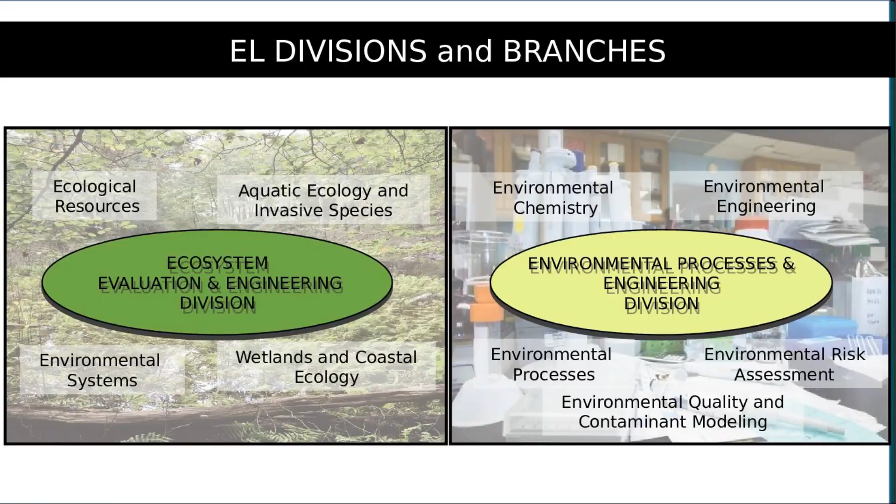And so with that, I'd like to transition to our first speaker, I believe will be Dr. Todd Bridges, to cover the first emerging capability area. Thank you for your time.

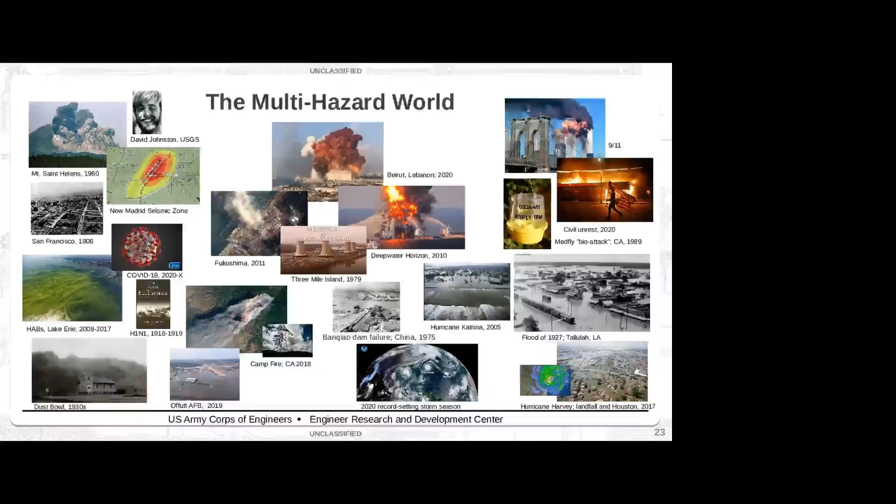In fact, in the 20th century, the amount of human-made mass in the form of these materials that was produced and put into use doubled every 20 years. That curve really challenges the whole notion of sustainability. Where's the end of this curve? Is there an end to this curve, especially as we approach a population of probably in excess of 10 billion people on the planet by the end of the century?

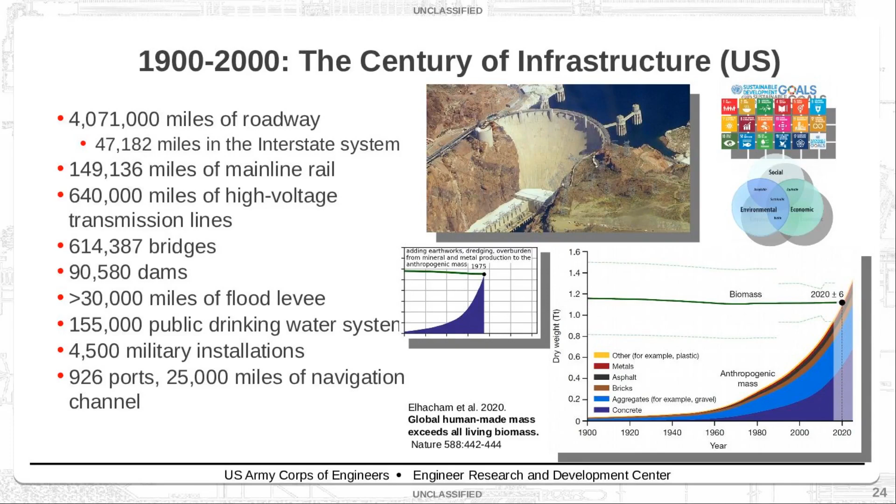So when we think about the infrastructure investment that's going to be made in the remainder of the 21st century, it's going to be a lot of money worldwide—the World Economic Forum estimates by mid-century that $100 trillion will be invested in infrastructure. What is that infrastructure going to look like, and how's it going to operate? That includes the idea of to what degree are we going to include natural systems more explicitly as a part of the infrastructure we develop.

And this is one example of what I mean by the natural system as infrastructure. Some scientists being supported by the insurance industry used insurance industry tools to estimate the benefits provided by mangrove forests in Florida during hurricanes, using one hurricane in particular to get specifics: Hurricane Irma. Their estimate, using insurance industry tools and models, was that mangroves were responsible for avoiding $1.5 billion in flood damages from that one storm.

This is one example of our Engineering with Nature initiative, which we began formally in 2010. We celebrated our 10th anniversary last year, seeking a more intentional alignment of the natural and the engineered to realize efficiency and sustainability in delivering infrastructure projects. We emphasize science and engineering to produce efficiencies, using natural processes to maximum benefit, expanding and diversifying the types of benefits we can produce from infrastructure, and being collaborative in producing these approaches and solutions.

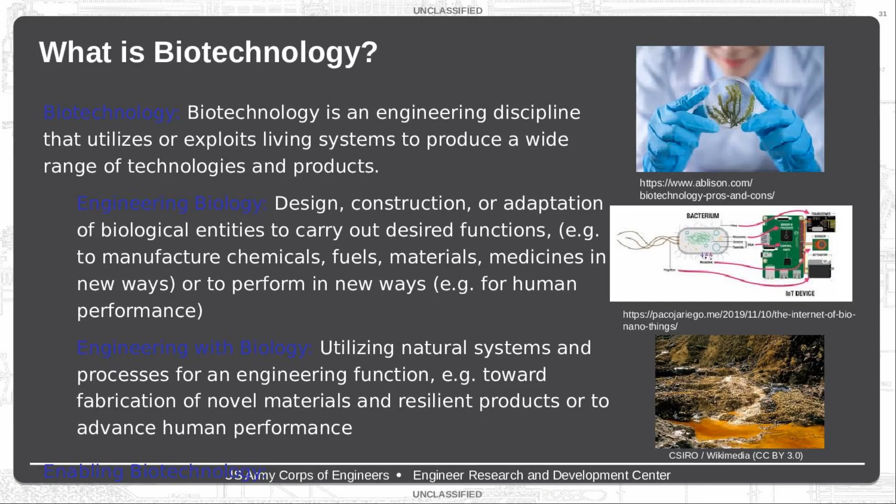Next slide. Just to give you an overview of how impactful biotechnology is now, one of the most important inventions for biotechnology has been fermentation, evidenced by evidence from thousands of years ago from the first beer that was produced. So production of wines and fermented drinks is really all about biotechnology and harnessing yeast to help us make more interesting beverages.

However, over the next 10, 20 years, we really expect the application area of biotechnology to expand from meats that are produced without animals to medical solutions for monogenic diseases, personalized diets, to synthetic silks produced by microbial factories. Some estimates are up to $2 trillion to $4 trillion for the whole world market.

Right now, they estimate 60% of the world's physical inputs could be made using biological means, that is, materials and other items, over the next 20 years, so having this impact of $4 trillion globally per year.

The most recent big impact that we've seen has been the rapid development of COVID-19 vaccines and tests. We've had an unprecedented rapid development of vaccines to different strains and varieties of COVID using mRNA technology, and a number of very specific tests developed rapidly for the presence of these viruses in humans and in saliva using biotechnology type tools.

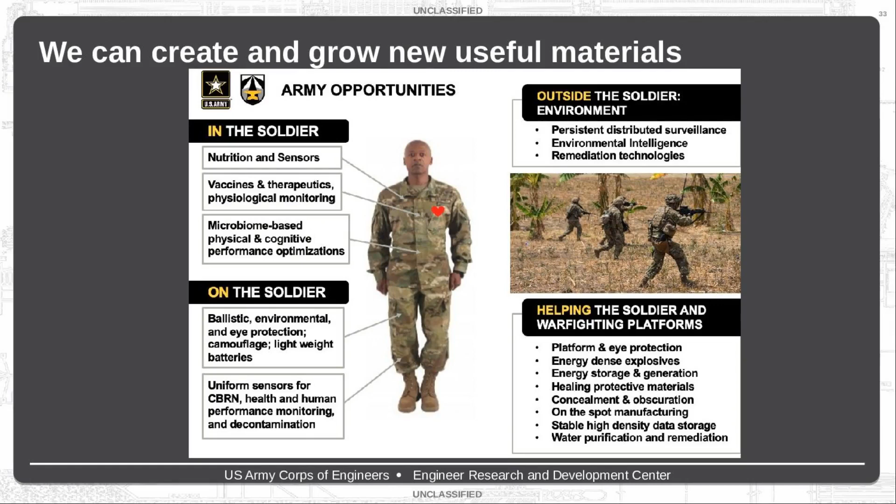So one of the big areas that are kind of non-biomedical is really growing structural materials. And that's where we're starting to get into ideas like engineering living materials, taking things like fungus that might grow very rapidly and using that to grow into structural elements.

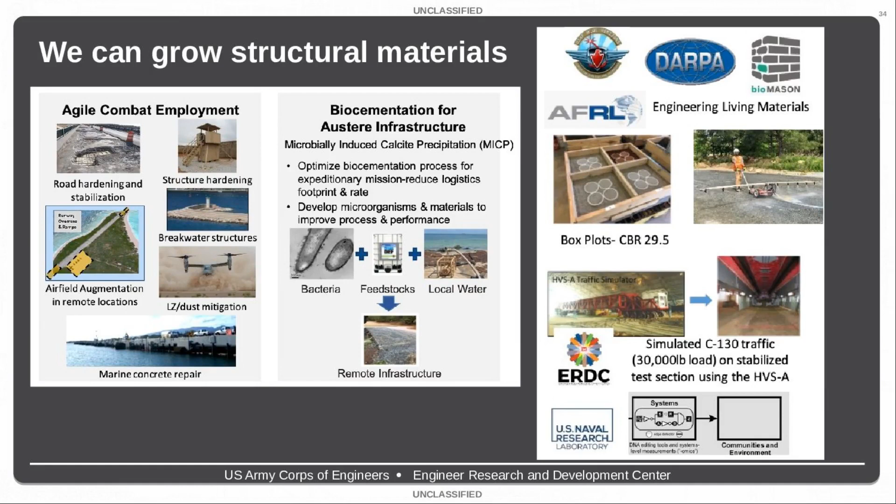And the importance of this is that it is very low carbon and takes a lot fewer materials than moving truckloads of cement materials around into different theaters.

So really, this is all about changing how we do engineering with nature. So while Todd was engineering with nature in a more natural way, here we're trying to actually engineer nature to help us do things in the environment.

Major areas that we're hoping to start developing products for are infrastructure, expeditionary infrastructure, ways that we can use biology to build structures out in the field for the Army. Self-destructing infrastructures, that is buildings or bridges that might fall apart when you don't need them, so they just sort of disappear. These processes are often low CO2 emission, so they don't contribute as much CO2 as all the billions of tons of cement that have been put over the last few years.

You can also design these processes for CO2 sequestration. There's methods for developing anti-corrosion, anti-fouling materials using bacteria. And also infrastructure failure can be addressed by developing bacteria that can fill cracks. And then self-repairing materials—there's potential for creating concrete embedded with bacteria that can start repairing it as it's being developed. Really, where we think this can apply is engineering nature for resilient infrastructures.

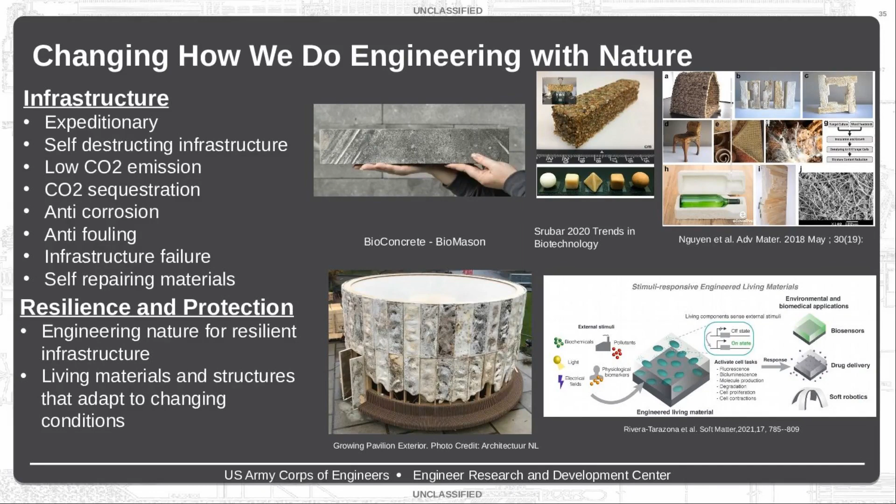There's been discoveries of using bacteria that you can put into cement that will start sealing up cracks as they occur. And in the upper right-hand corner is an illustration of using fungi to build buildings. This is using myco bricks from Ecovative to construct this building, and you can actually have that building start growing over time. We also now have technologies where we can start making resilient wetlands by making them resistant to insects and salt water.

Biotechnologies that can eliminate invasive plant species. Trying to make self-cleaning and stress-reporting streams by putting bacteria on them that will sense chemicals in the environment, destroy them, and tell you the health status of the streams. One area where this could have direct applications is trying to enhance phytoremediation of recalcitrant chemicals, such as at the Niagara Falls storage site, which is one engineering-with-nature project.

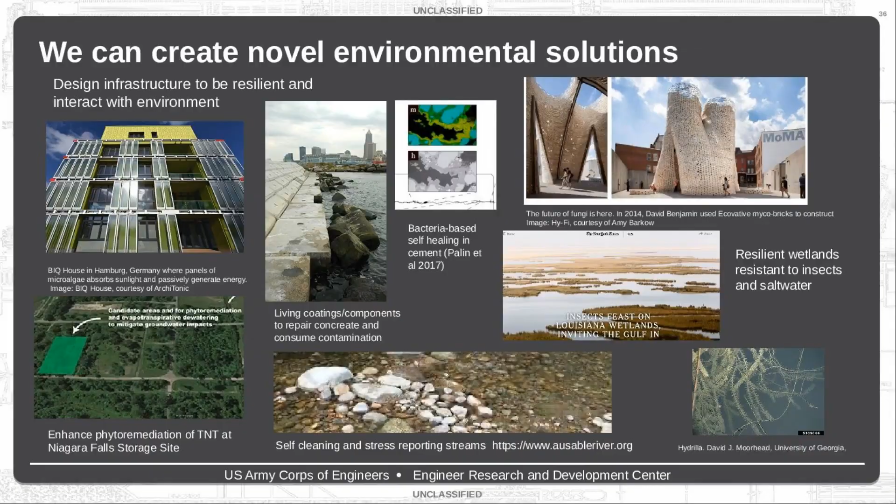Well, that was the end of my talk, and I just wanted to give you a taste of what biotechnology is and what it can do for you. Thank you.

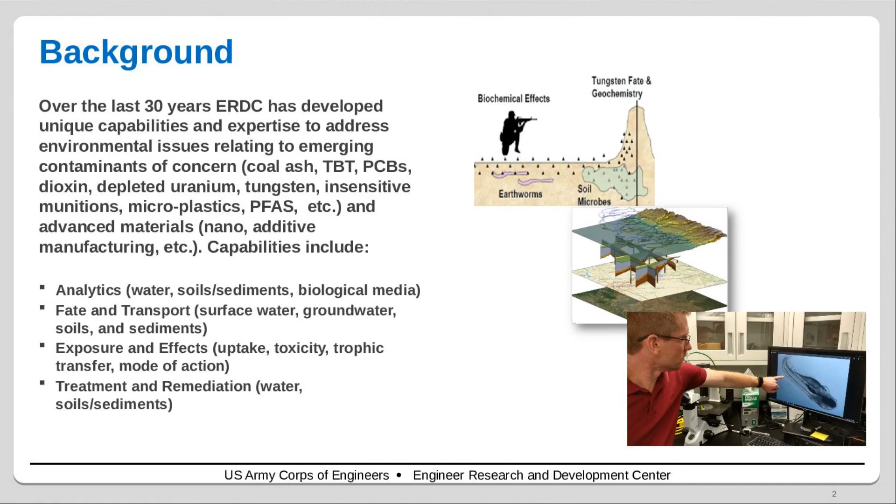The problem we encounter looking back at the historical approach to ECs, emerging contaminants, is it's a little bit like whack-a-mole. Often we don't realize there's a problem until it's actually having a programmatic impact. And as most folks on the phone are aware, it takes some time to spin up RDT&E to be able to address those issues. So we find ourselves in a reactive mode, responding to rather than actually engaging with or affecting the regulatory environment we find ourselves in.

The second issue is that it's been done piecemeal. The squeaky wheel gets the grease, so to speak. For example, on PFAS, the first and highest priority was addressing drinking water on our military installations, because of course we want to protect our soldiers. But we're not thinking broader and more holistically about the fact that there are also large implications on our civil works side for our dredging and navigation mission.

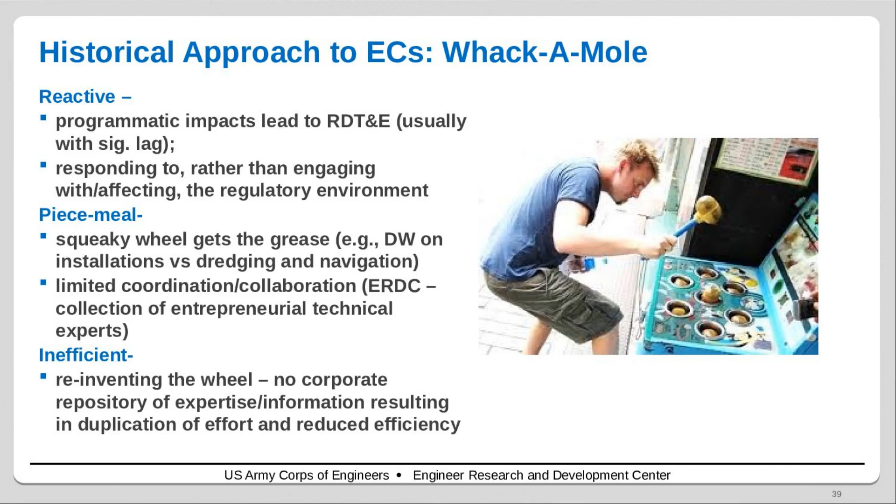So as I mentioned at the outset of the talk, around 2017, late 2017 early 2018, we developed this program for emerging contaminants. The thought process here was really to avail ourselves of the capability sets and facilities across the ERDC, thinking back to Dr. Russo's talk of introducing the 7 laboratories and the broad array of technical expertise that we have here at ERDC, and basically creating a coordinated multidisciplinary approach to provide turnkey support for addressing emerging contaminant issues. This includes things like rapid assessment capabilities, development of new analytical techniques.

Taking advantage of our high performance computational capabilities through our information technology laboratory to utilize things like advanced computational models that enable us to do a read across, where we might have a lot of information about one set of compounds, and utilizing that information and the chemical structure for compounds we know less about, we're able to infer potential risk associated with the chemical and physical properties of those compounds.

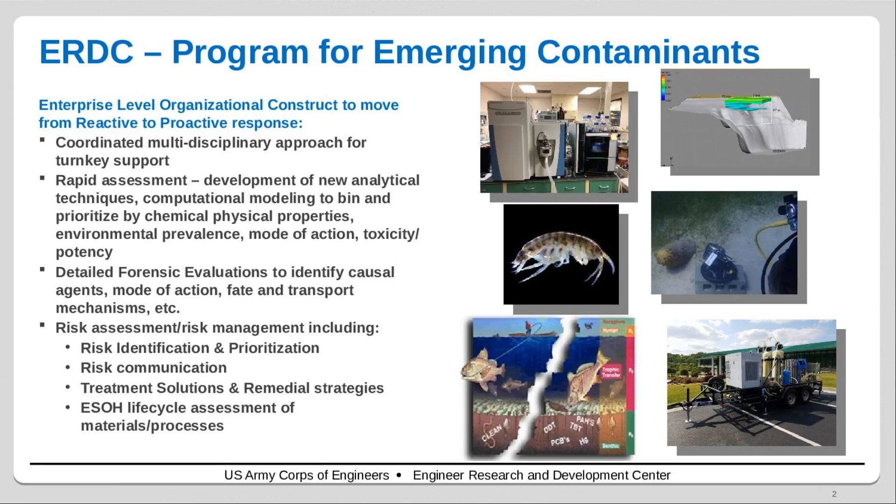So the one thing that the center is trying to do is avail itself of a whole of ERDC approach in these 4 key topical areas. On the analysis front, we have capabilities within the environmental lab and the cold regions environmental research lab, as well as the geotechnical and structures laboratory. And I should mention also ITL, where we develop new sensor platforms to detect and quantify contaminants across the full spectrum of environmental media: air, water, soil, sediments, biota, and materials.

On the exposure side, we have capabilities and expertise in EL and CRREL and GSL, our coastal hydraulics lab, as well as the high performance computing capabilities at ITL to enable us to better understand fate and transport mechanisms, uptake and movement through food webs.

On the effects side, we have capabilities and expertise within EL and CRREL, again supported by the big data capabilities of ITL. And then finally at the risk characterization and management end of the spectrum, again EL, our construction engineering research laboratory, and ITL provide support on things like computational modeling, life cycle assessment, and treatment and remediation.

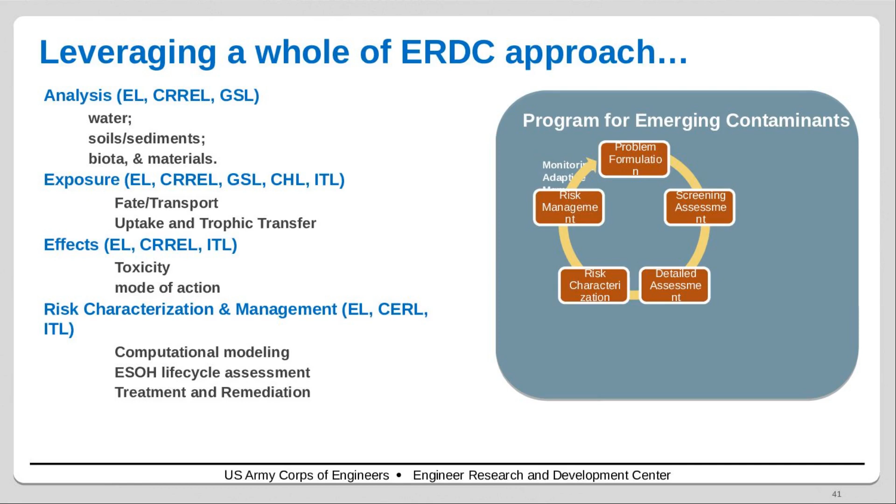So not only do we avail ourselves of the expertise within ERDC across our 7 laboratories, we also have mechanisms, vehicles to work with outside entities. We have everything from intergovernmental agreements and MOAs to work with other federal agencies as well as within the DoD. We have agreements with a number of academic institutions. We do a lot of work through cooperative research and development agreements with private industry, and we have international agreements where we partner with other nations to work on specific issues.

So just by way of example, one of the big contaminants of the day for DoD and others is per- and polyfluoroalkyl substances, and we've certainly been doing quite a bit of work on that front. The thing that I want to convey is that these are not siloed efforts. A lot of what we learn in the analyses and the exposure front feeds into supporting our understanding of risk and also in developing solutions. So there's a lot of crosswalk that happens, and that's the advantage of having an organized program to facilitate that exchange of information and foster those kinds of collaborative exchanges.

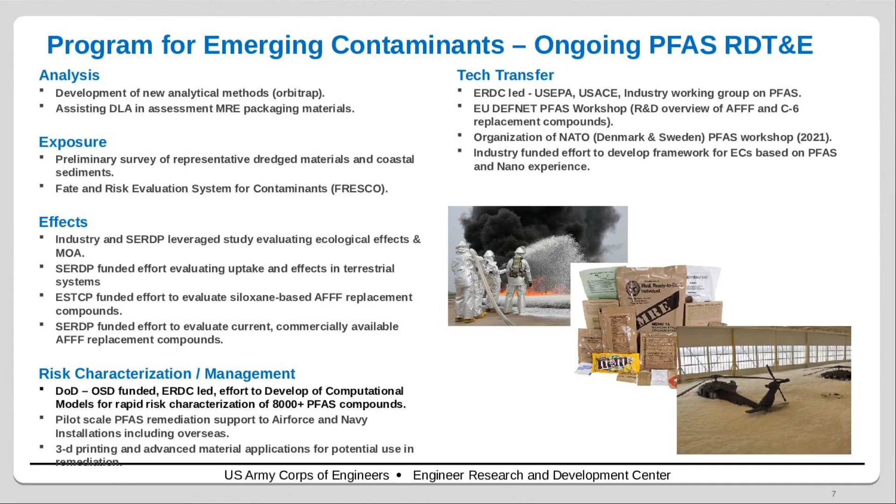And with that, I think I'm on my last slide. Yep.

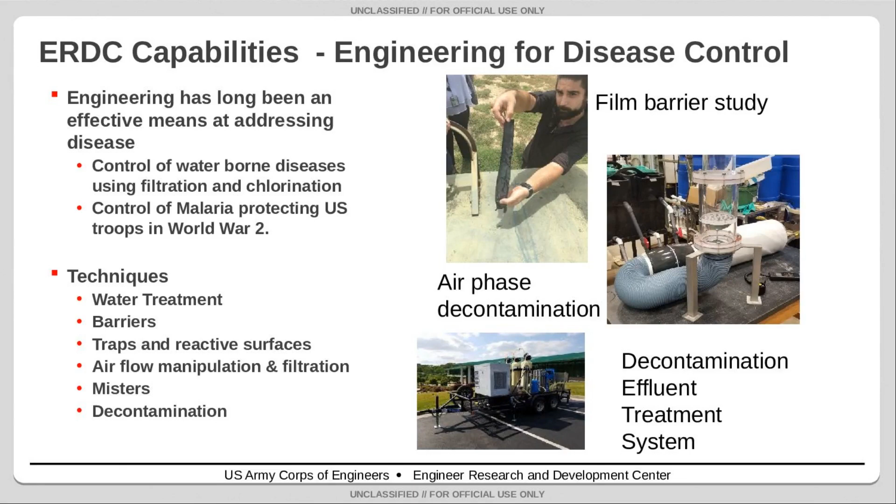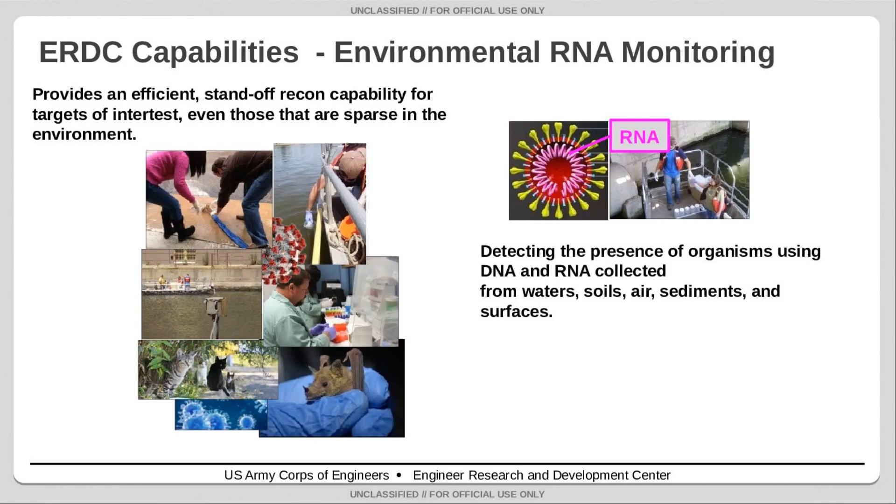We, of course, use biotechnology that Ed mentioned to address more unique sampling strategies like RNA monitoring to address pathogens, and we can do it for COVID, of course. I will be skipping it because it's late in the game.

On risk assessment, the previous presentation talked about that. What I'd like to highlight is that for pathogens, you need to modify the traditional risk assessment framework, and we are working on that in the context of both synthetic biology and microbial risk assessment and pathogens. There are unique features of these pathogens that need to be addressed, and we are working on that, but more needs to be done. There are big gaps, and again, that may be collaboration potential.

One of these modeling efforts that we're working on now with HHS and FDA, we try to look at vaccine and medical supply chains, because we clearly see that design for efficiency that was implemented fails when you have pandemics or global crises like this one. And the question is how we, as a government, can ensure resilience in supply chain networks.

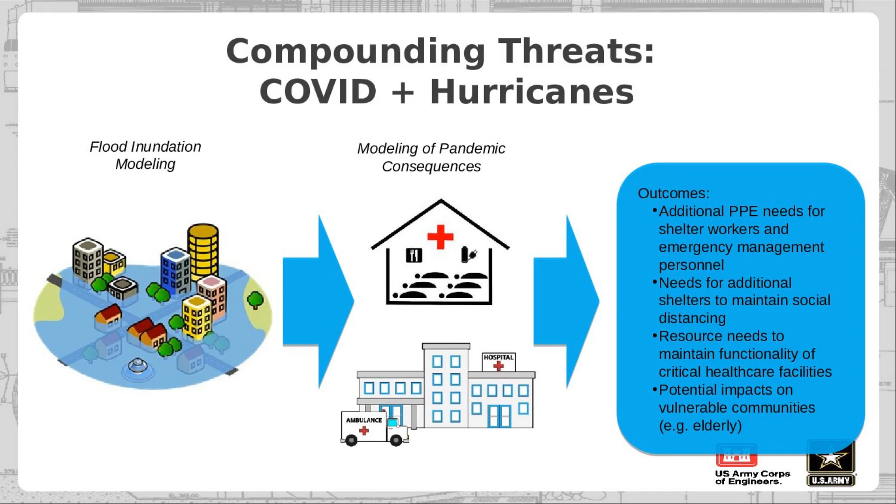So the last thing I'd like to mention, we live in a world where looking at one threat at a time is not sufficient. We clearly see what we call compounding threats. We have projects now looking at how we should implement crisis management tools that have been used for floods, under the condition of COVID. We cannot use the same models, the same methods, so everything needs to be updated. But even on the physical side, if you have compounding threats of flood and hurricanes and earthquake, or you name it, or socio-political crises on top of that, it may completely change the strategy that you implement in addressing them.

So yeah, that's all I have to say. Sorry for rushing it, but we're already 10 minutes behind schedule. Thank you.

That's great. Well, I know we're over time, so I'm just going to try to summarize questions here, and this was for the whole group. What can the SAME community do to interface with and support ERDC? I've got a couple questions, so I'll throw them out and we'll go speaker to speaker. Is there any change in focus, funding, or priority with the new administration? And also, I know Tyndall was mentioned as a demonstration project, and one thing you were all talking about was how you share information across groups, which seems to be the plan with Tyndall too—try new things and implement those across the broader Army program. So I'll start with those, and if we have more time, I'll go on from there.

Hi, this is Edmond. I can start with some of the leading questions you mentioned. We have a fairly set cadre of federal researchers that work for ERDC, but at times we get surges in funding, whether congressional adds or supplemental funding, that require us to expand our capability and competency sets from time to time. We would normally do that through various acquisition strategies through our contracting division, and there are many different instruments they use to do that.